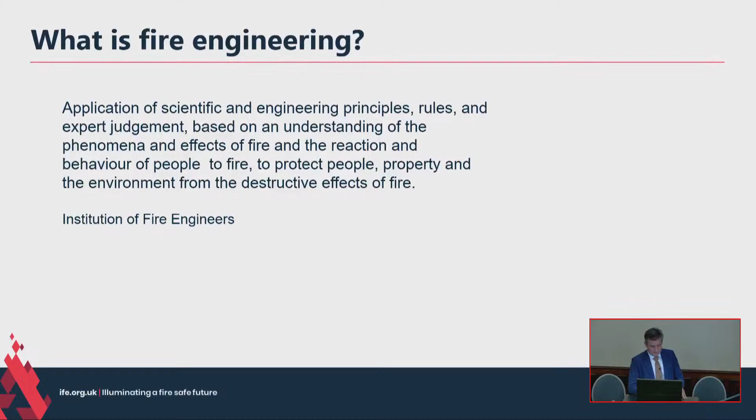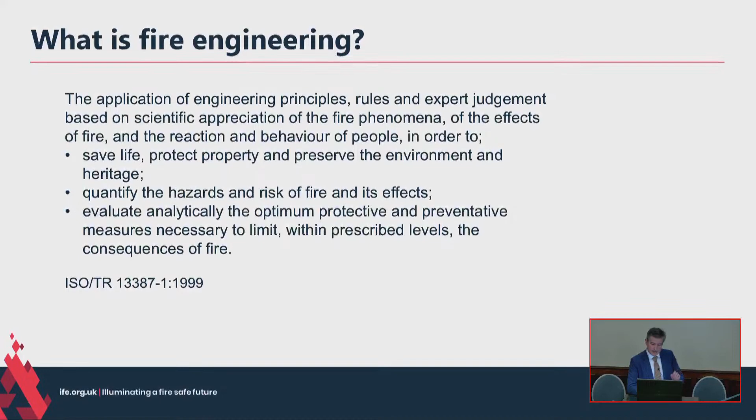There is another definition, and I prefer this one because it's really simple: use of engineering principles for the achievement of fire safety. So the kind of fire engineering I'm talking about today is a performance-based way of meeting functional requirements that are set out in national building regulations.

And in the UK, those functional requirements come from various bits of legislation. We have the Building Act, we have the Sustainable and Secure Buildings Act, and most recently, coming into force completely next April 2024, is the Building Safety Act, particularly for higher risk buildings.

But the purposes of these regulations are listed here. We've got health, safety, welfare of people in and around buildings. The legislation clearly has a life safety focus. Interestingly, you'll notice that protection of property or protection of business is not really mentioned in these purposes. Well, unless you argue that preventing buildings from burning down helps with sustainability, and that's probably a valid argument.

So we'll just try and remember that legislation is, quite rightly, convincing us that fire safety is about life safety. But what about that little bit extra? We'll come on to that later.

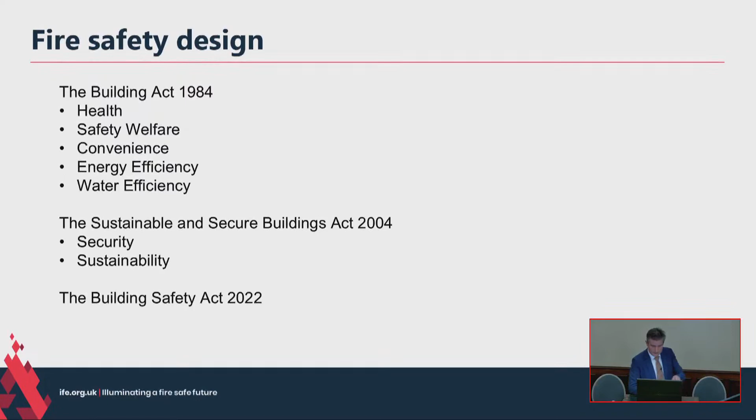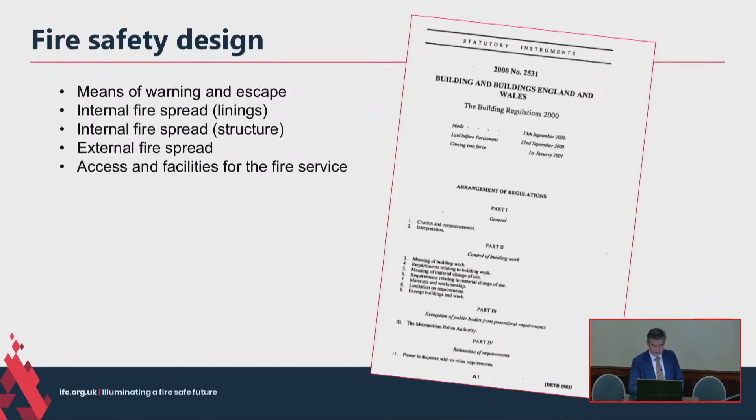And those functional requirements for fire safety in building design are set out in building regulations. I just happen to have the building regulations of England and Wales here, and building standards in Scotland. And they're really quite simple goals, such as these that are listed in Schedule 1 requirements for fire safety. It's not always been this way, though.

Statutory fire safety provision in the UK has evolved slowly over many centuries, and it's largely been driven by major disasters. In the 20th century, experiences of fires during the Second World War were incorporated into the post-war building studies on fire grading of buildings. And these were seen as landmark documents of their day, influencing the technical content of subsequent building regulations. By the time further amendments were made in 1976, so that book on the right, the regulations comprised 307 pages, and they were highly prescriptive.

These traditional prescriptive building regulation systems had procedures to oversee departures from a standard solution, but these seemed to be cumbersome in nature. So in England and Wales, such relaxations were at one time only granted by central government. And that was seen as quite a cumbersome and difficult system.

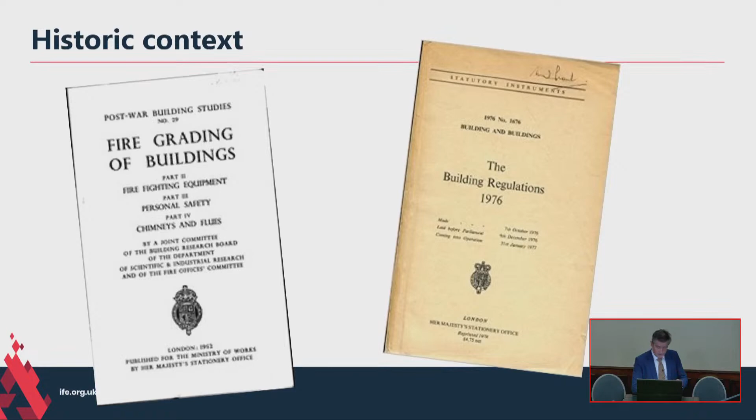So where has performance-based engineering come from? Well, it's been born out of the need for it. As a result of a large and rapid increase in innovative and diversified building design, including the expansion of air travel in the early 1970s, prescriptive regulations became demonstrably restrictive and inflexible. By way of example, air travel required airports to start handling large numbers of people who were unfamiliar with their building, but they needed to be handled in a pleasant and efficient way.

Designs based on prescriptive standards of the time simply couldn't cope with this new design requirement. So some engineers and scientists saw the possibility of applying scientific research directly to the design of individual buildings.

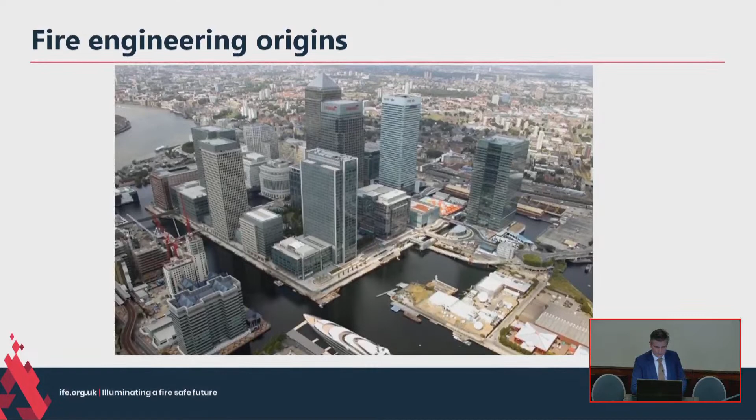Whilst formal recognition and acceptance of the use of fire engineering had been given in England and Wales within that 1985 edition of the regulations and accompanying Approved Document B, there was no guidance given on how to use those principles. So pressure for guidance and a structure for the application of fire engineering to the design of buildings came from designers, and an initiative by the British Standards Institution to provide a code of practice was begun.

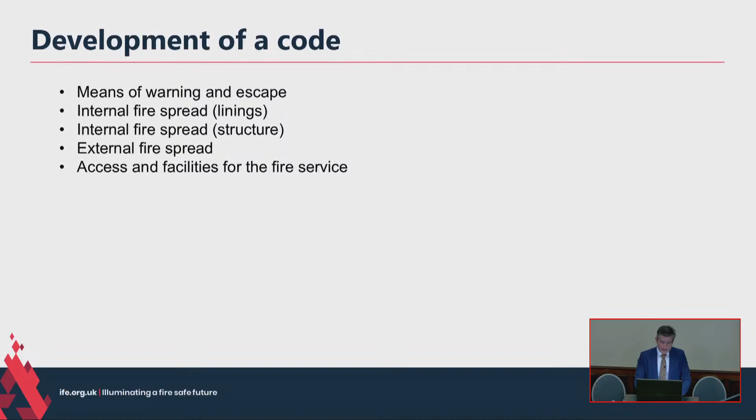In 1989, a format and a list of contents was presented to BSI, and by the end of 1990, a small panel of fire safety engineers was formed to undertake a three-year contract administered by BSI, which would culminate in a code of practice giving the framework for fire engineering design in buildings. The panel first met in 1991, and the draft code of practice was published as Draft for Development, DD 240, in 1997. Six years - that's not bad for BSI.

DD 240 was described at the time as being the most important document produced in the UK in support of the use of these more fundamental approaches to fire safety design. It provided the designer and the regulatory enforcement authorities with an overview of what was considered to be necessary. It was structured into subsystems, and importantly, it indicated that there were still gaps in knowledge and much still had to be achieved by engineering judgment.

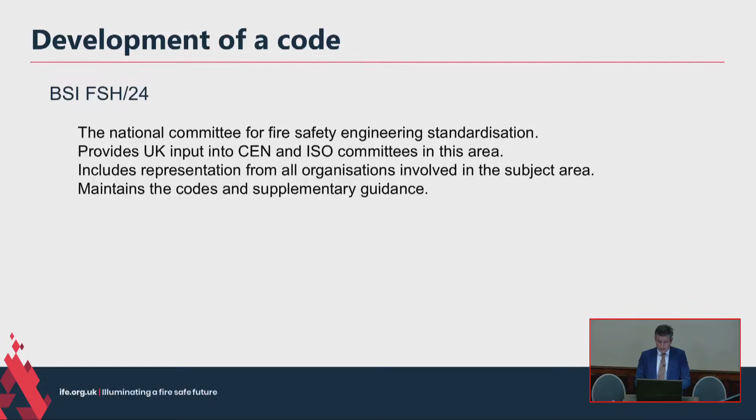Since that publication, DD 240, the group within the British Standards Institution, FSH 24, is a technical committee. They remain responsible for the development of standards of fire engineering in buildings. That committee draws representatives from a wide range of stakeholder organisations, as well as research bodies and teaching and practising fire engineers. So FSH 24 is the National Committee for Fire Engineering, and it mirrors much of the work that goes on in ISO committees around the world.

FSH 24 has been responsible for developing, from that Draft for Development DD 240, the standard BS 7974. This document was first published in 2001. It's supported by 8 published documents, each containing detailed guidance on different aspects of fire engineering, from background information to quantitative risk assessment.

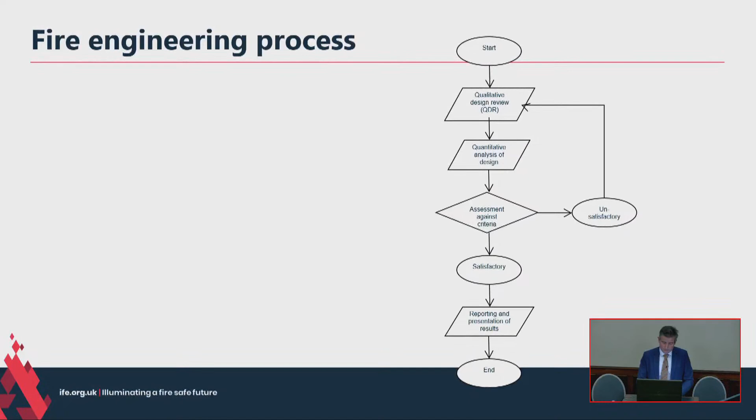A framework for the application of fire engineering is provided in the standard, and the essence of it is defined here - this flowchart is what you see at the start of the document. Essentially, you can boil it down to three stages. The first is a qualitative design review, where the scope and objectives of the fire safety design are defined. These tend to be drawn from the architectural requirements and the functionality of the building. The performance criteria are established and acceptance criteria are set. So that QDR is a very important part of the process.

Then the next bit is the quantitative analysis. That's where engineering methods - hard sums, maths, computational fluid dynamics, that kind of thing - go on to evaluate potential solutions. Then the important bit is assessing those outputs against criteria. The results of the quantitative analysis are then compared against the acceptance criteria to work out whether the solution is safe or otherwise.

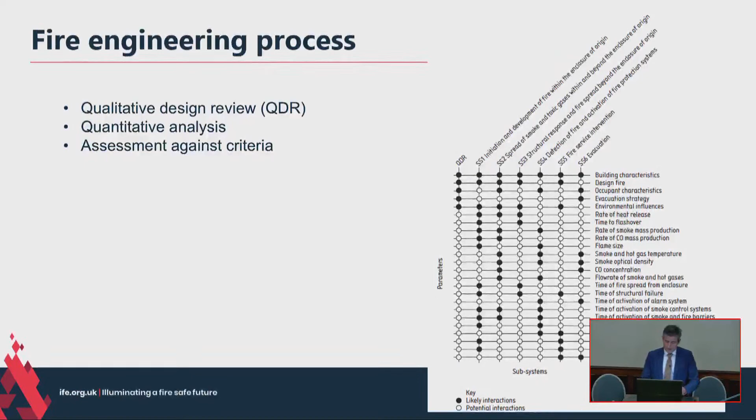That quantitative part is divided into a number of separate parts or subsystems. Each can be used in isolation, or they can be used in combination, which is represented on this difficult to read and unnecessarily complicated diagram you see above. That shows how these different subsystems work together.

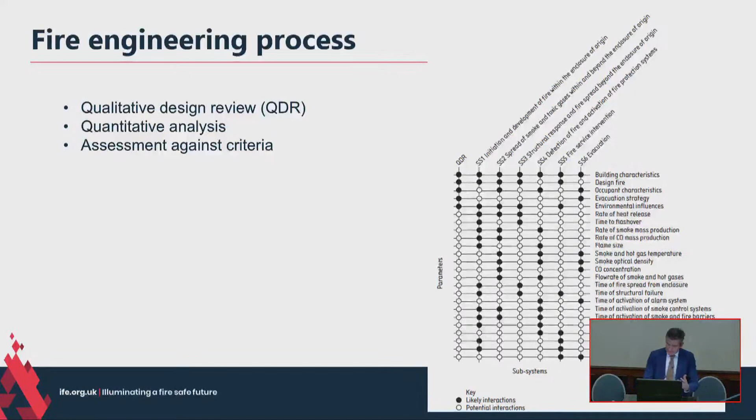The work of FSH24 is continuous. I go on about FSH24 quite a bit because I chair it, so I'm quite close to how things get developed there. The last part written from scratch was in 2012. That was PD8, which is an interesting document because it describes a way of introducing those property protection and mission continuity objectives that we talked about at the beginning, which are difficult to find sometimes.

So it's an invaluable tool that's really used in discussions between architects and their clients about what they should be paying for up front, getting resilience in the design.

Then, as part of BSI's 5-year review cycle, it was decided in 2016 that it was about time we revised the documents. So we got a panel of volunteers and experts together, and that revision process began. After a period of hard work, through a draft published for public comment, the current standard was launched in 2019.

I'll just quickly tell you what's different from the previous version. The British standard itself has been completely rewritten. It now incorporates those recommendations that were previously in PD8, which is why that's shaded out now. PD0 has been withdrawn because it was largely duplicated. And PD4 has been withdrawn because it provided guidance on fire detection and activation of fire protection systems, but that guidance can now be found elsewhere in different standards.

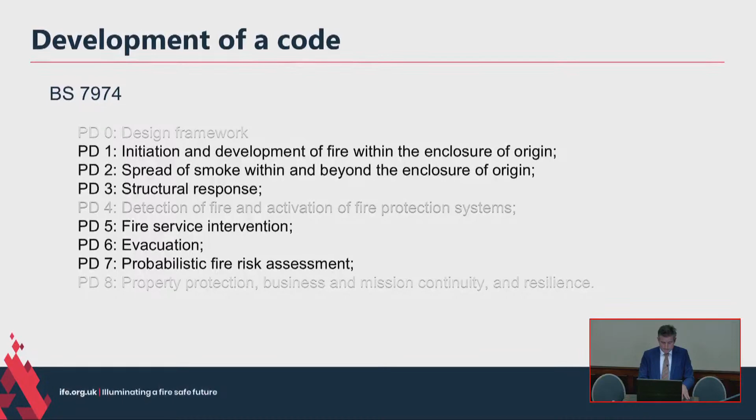PD5 was amended rather than fundamentally revised, to reflect changes in practice and advancements in knowledge. But importantly, it was amended to incorporate some of the emerging lessons coming from the Grenfell Tower public inquiry phase 1 findings. We know more findings will come when the public inquiry findings are released next year, so there'll be more to do there.

And that's where we are today. I can tell you've done the maths and you know there's a 5-year cycle, and it was 2019, so that's right, next year we're going to have to start that process again.

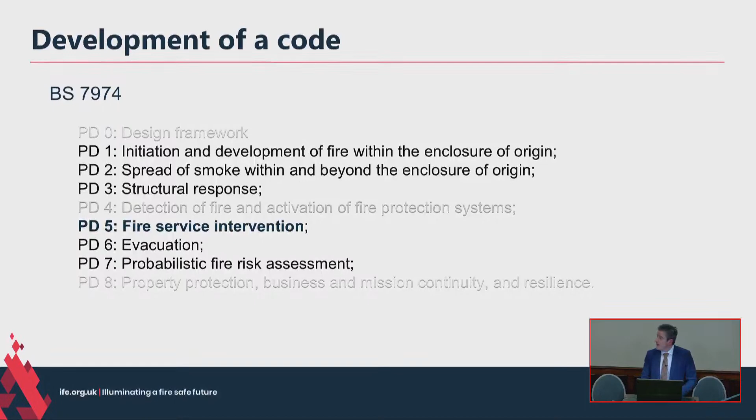I think it's generally agreed that traditional prescriptive design techniques have their place, but they can be a barrier or a stunt to innovation and creativity. They're impossible to apply sensibly to particular buildings with special functions, such as entertainment venues, high-rise developments, sports stadia, airports. Fire safety engineering has really freed up building design, facilitating it, while because we've got that standardisation process in BS 7974, the process has provided suitable levels of safety when carried out properly.

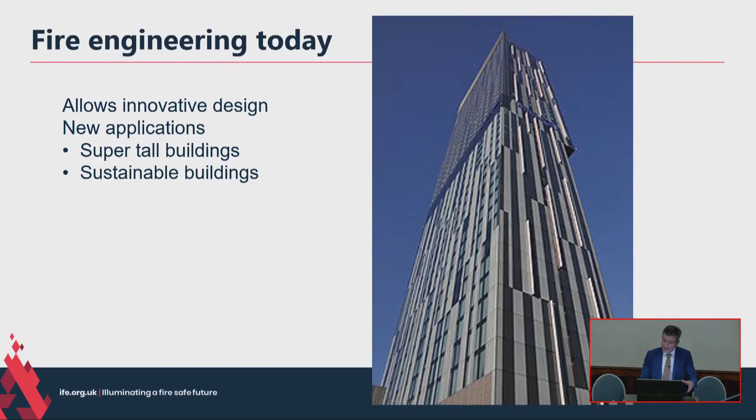Fire engineering was originally the pioneering method enabling the design of buildings such as airports and enclosed shopping centres, but such buildings are now commonplace. The new frontier for fire engineering includes the design of very tall buildings, such as those using lifts for rapid evacuation of occupants. Another area where fire engineering is beginning to impact concerns the sustainable construction agenda, helping to address that balance between protection of the environment and prudent use of natural resources.

Now, despite these successes, research has revealed that concerns exist surrounding the use of fire engineering principles, including questions as to whether the fire engineering design community has the knowledge, data and tools required to fully undertake these advanced analyses. Furthermore, motivations for using fire engineering are sometimes being questioned.

Numerous examples are being documented where architects, and other building designers, are seen to be trying to buy their way out of problems they've created through poor design, using complex technology and inappropriate fire engineering arguments. One article I read describes this as performance-justified engineering, and warns that fire engineering constitutes a significant threat to its credibility as a design tool.

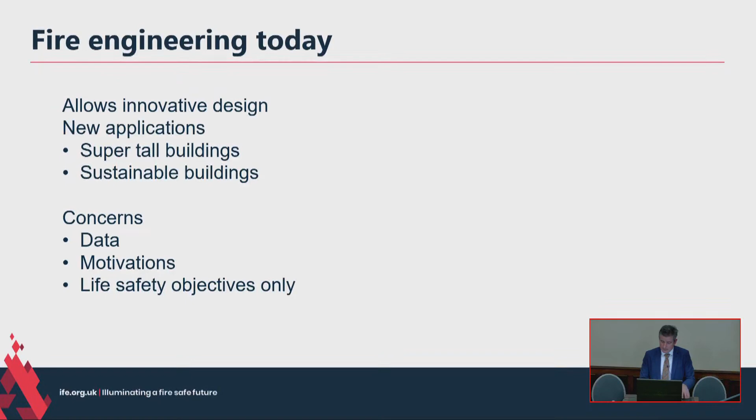Similarly, there are concerns over the fire safety objectives used to compile a fire strategy. It's common practice for projects to concentrate solely on life safety, because that's the bit mandated by the building regulations, and it can have a detrimental effect on property and business protection when compared with prescriptive solutions. I'll talk about an example of that later.

So, it's widely accepted that the profession has matured from its origins in the mid-80s to a situation today where it's emerged as a recognised separate engineering discipline. Fire engineering is becoming more accepted in the UK, and a change has been seen in the types of buildings fire engineering is applied to, recognising that it's frequently applied to more mundane projects.

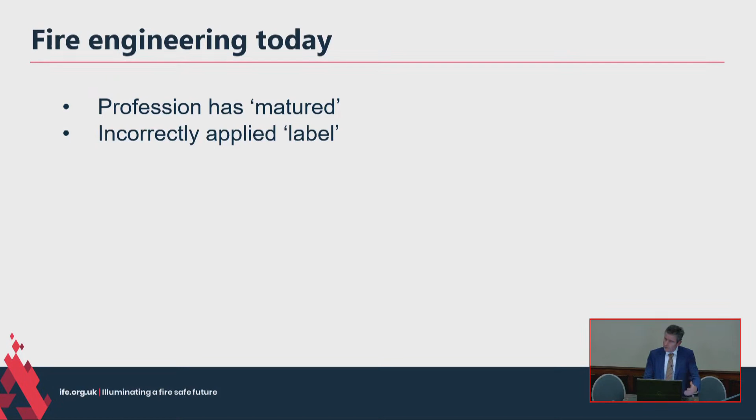There sometimes feels as though there's a proliferation of designs for buildings which don't comply with prescriptive codes that have been labelled as fire engineering, because it enables them to be put forward with an argument as to why they don't need to comply. It's important that we use fire engineering correctly, for the right reasons and for the right projects.

Fire engineering has been able to be used more widely because the tools available are now more sophisticated. That's another indication of a maturing discipline. Think about the computing power needed to do CFD simulations and things like that—that's come on leaps and bounds, so we can do more iterations of designs on desktop computers, where it might have taken several computers in a different room running overnight in some instances before.

It was a really interesting piece of research, and it involved me asking interviewees about the perception of the roles of other stakeholders involved in fire engineering. Analysis of their responses shows that interviewees had more critical comments to make about their fellow professionals. So this is why I tread carefully at this point.

The four stakeholder groups that attracted most criticism were architects, regulations enforcers, sometimes known as building control, insurers, and practitioners—fire engineers themselves. So over the next few slides, there's a selection of sound bites. It's not the whole story, so don't shoot me, I'm just the messenger.

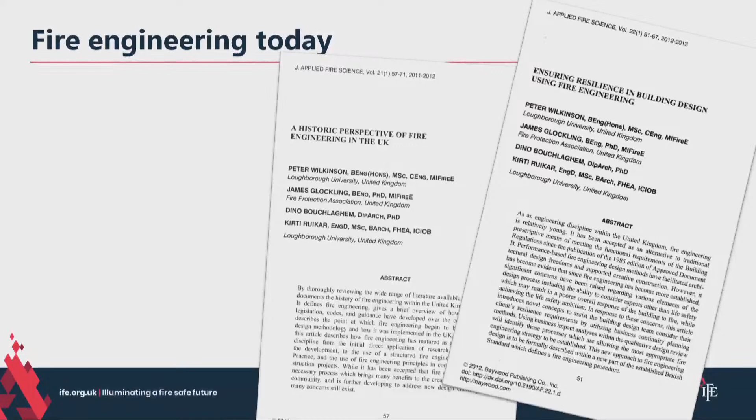Whilst the input from academics is widely valued by their fellow professionals, it was felt that they're often disconnected or removed from the real world. This was felt both in terms of teaching and research, as their industrial experience is perceived to be limited, and they struggle to keep up with the speed of change.

The work of building designers was described as mostly well-intentioned. However, they did receive quite a bit of criticism from other interviewees for not understanding fire safety issues and not understanding how to use fire engineers. There was an issue reported of architects losing skills, raised a few times, as well as many interviewees criticising what they considered to be inadequate fire safety-related training in architectural degrees.

End users—people who commission new buildings or use the buildings—their criticism can be summed up as a lack of engagement when the building is designed, and then falling short of their responsibilities during the operation phase. It was stated that often end users don't even know that they're in a fire engineered building, because of the lack of information that's transferred to them through the construction company to the client.

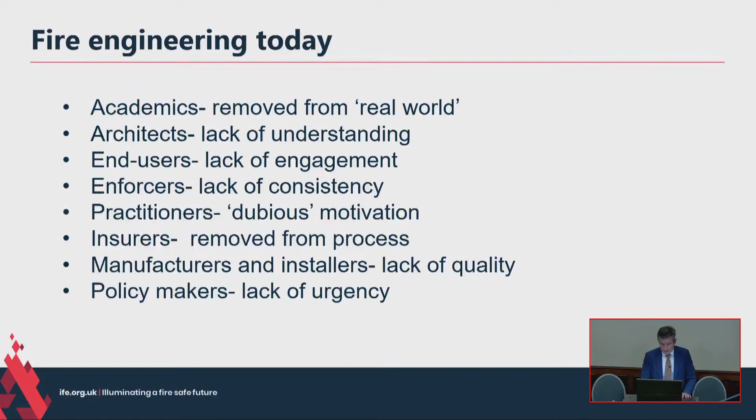Right, I think we can brush over that one for now.

Institutions and trade bodies are seen as vital within the fire engineering process—they're the groups who translate research into practice. Even the IFE received some criticism. It was thought they could do more to promote good practice, regulate its membership, things like that.

I'm pleased to think that since I did this research, great strides have been made and continue to be made, particularly following the Grenfell Tower fire and the review of building regulations and fire safety carried out by Dame Judith Hackitt. She really amplified all the aspects that this research revealed.

And much support has been given to tackle some of these issues and make the environment that we work in as fire engineers better.

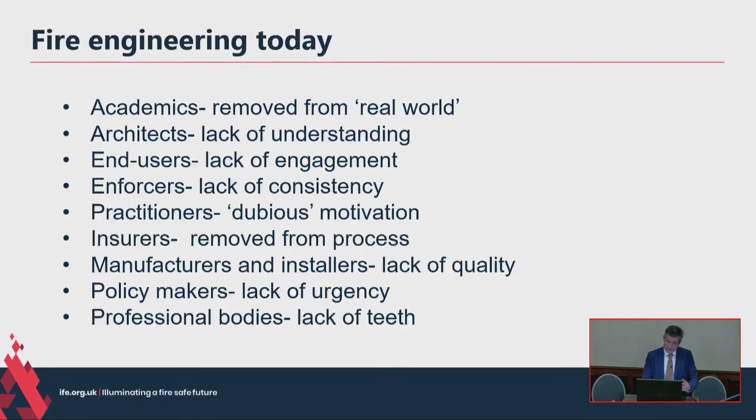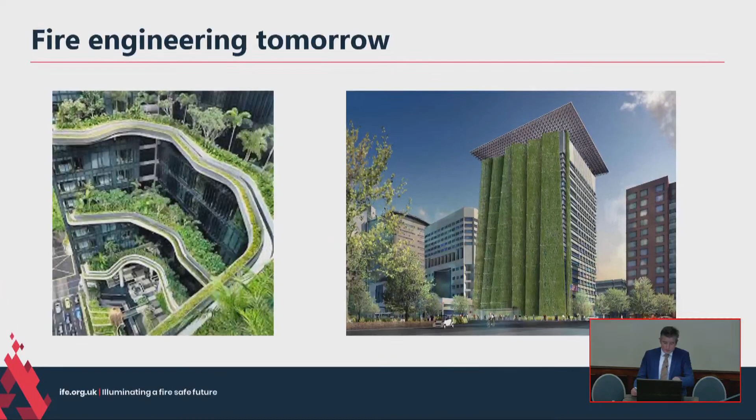So thinking about tomorrow and how fire engineering can be, whether our future building design challenges are squiggly or straight, whether they're even floating, whether our buildings are green or even golden, fire engineering uses established methodologies such as that outlined in BS 7974 as a key process for facilitating such design freedoms whilst giving a robust methodology to ensure adequate levels of safety and resilience provided.

Now I'm checking the time, and I know I'm okay, because I'm now going to explore the thorny issue of competence for the fire engineer. And I'm going to be a bit selfish because I'm quite interested in the history and how our institution developed and how the profession started.

So I'm going to take a quick look back at some of the discussions that were had about competence in the past. I'm going to revisit some of those light bulb moments, because it's very interesting to see that there's nothing new in this. People have been saying it for a long time and we just seem to forget.

So I'm going to begin with some wise words from one of the pioneers of fire engineering, and I've already mentioned her because she was influential in the design of Stansted Airport - this is Margaret Law. Professor Law began her career as a scientist at the Fire Research Station, and she carried out research into many aspects of fire behaviour and its effects on building materials and structures. She became involved in the application of these research results into building regulations, codes of practice and design guides, and she joined Arup to act as an advisor on fire engineering for those projects that they were designing.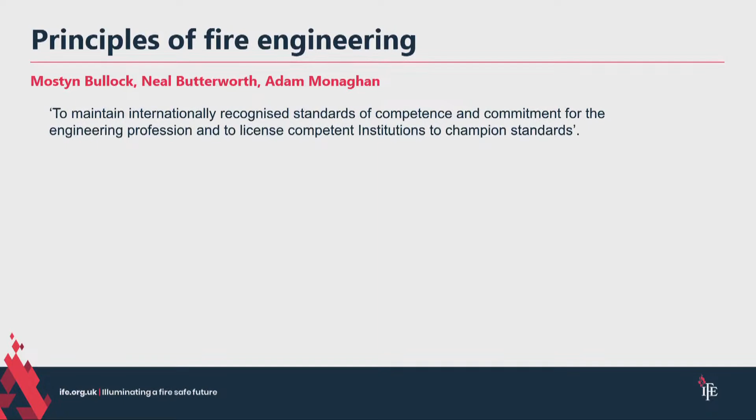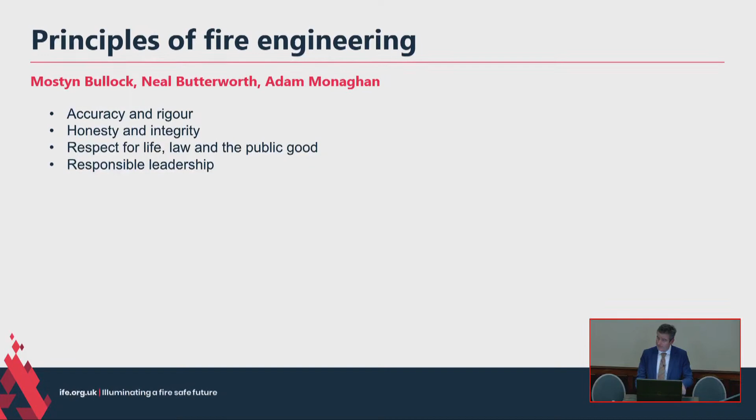So we've just been through these 4 pillars, and I was saying how this led to the enhancement of IFE's whistleblowing policy and establishment of an ethics committee. The Engineering Council and the Royal Academy of Engineering built on their Statement of Ethical Principles, established in 2019. The group published a report called Engineering Ethics: Maintaining Society's Trust in the Engineering Profession. It proposes actions and appropriate regulation to achieve a more ethical culture in the UK's engineering profession, reminding us of the inevitable tensions between profitability, sustainability and safety that engineers need to be aware of and balance.

There have been some important questions posed in recent years, and social media has amplified that public scrutiny. This report cites the work of Dame Judith Hackitt, who carried out her review of the building regulations and fire safety following the Grenfell Tower tragedy. She highlighted that it was a cultural issue across the construction sector, which can be described as a race to the bottom, caused either through ignorance, indifference, or because the system does not facilitate good practice.

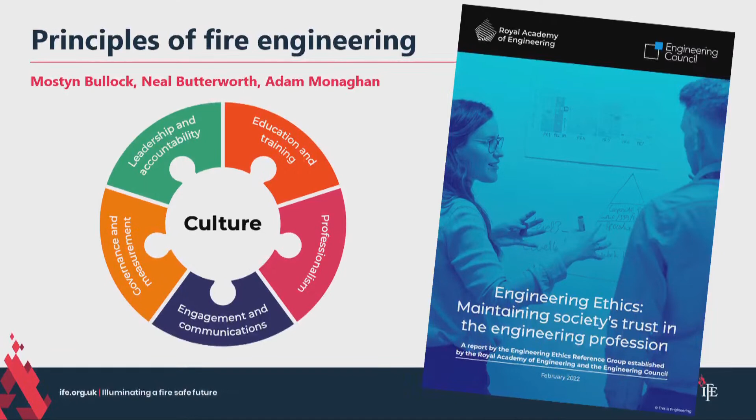This is the final person I want to talk about, who gives some important information about competence: Dr. Angus Law, a lecturer in fire safety engineering at the University of Edinburgh and a member of IFE. He was asked to chair a meeting on competence in June 2018 by the industry response group, set up following the Grenfell Tower fire. I love a good quotation, and Angus quoted Confucius: 'Real knowledge is to know the extent of one's ignorance.' He also cited work by Kruger and Dunning from 1999.

Are you confident because you have knowledge, or are you confident because you have no knowledge? The purpose of this aside was to make the point that one of the most important aspects of competence is assessment of self-competence. But there's an inherent difficulty in that, because a lack of competence can give an illusion of competence, and often those with the least competence consider themselves the most competent.

Bit of a conundrum. But Angus introduced the concepts of specific competence, common competence, and interdependencies. Specific competence: particular professions have specific competencies that only that profession can have and assess—for example, specific fire engineering skills. Common competencies are those across professions, and professional ethics sort of sit in that type. Then there are interdependencies—competencies required of one profession by another. He also said a professional institution, by definition, should have a monopoly on a given activity; for example, a fire engineer can only be assessed by a fire engineer.

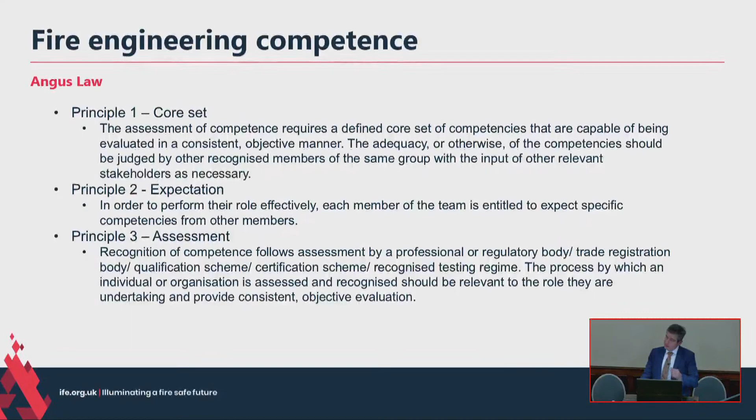The core set of principles and expectation and assessment was a kickstart for work which has led to another BSI document I'm going to tell you about, called Flex 8670.

This is the core criteria for building safety in a competence framework. It's a code of practice, published in April 2021, created in response to findings from the Hackitt Review, which highlighted a fragmented approach and a lack of consistency in the processes and standards for assuring competence of those working on buildings as a major flaw in the current system.

Flex 8670 provides a core set of principles of competence, including leading and managing safety, communicating safety, delivering safety, risk management, regulations, processes, building systems, ethics, and fire and life safety. Whatever the profession, everyone should have an understanding of some aspects of fire and life safety.

So what's the common theme with Margaret Law, the principles outlined so well by Mostyn, Adam and Neal, the work from Angus Law, the Royal Academy of Engineering's work, and Flex 8670? Well, I see it as this.

Amongst other things, being competent is a combination of acquiring knowledge, practicing experience, and now we know, living by appropriate behaviours. I think as an institution and as a profession, we've known this for some time. And for me, the important element of this is the behavioural aspect—it's about taking personal responsibility.

We have members representing the whole spectrum of the fire sector. I've said we're a professional engineering institution, so we're licensed by the Engineering Council to register chartered engineers, incorporated engineers, or engineering technicians, and we operate a UK-based fire risk assessor register. And there are some statistics here: 11,000 members worldwide, lots of branches, lots of exams, lots of registrants.

I'm on the home stretch now. So, why is what we do still relevant?

Here's the obligatory photo that precedes most building safety presentations these days. I appreciate it's now 6.5 years ago, but we can all reflect that in June 2017 in West London there was a tragic fire that claimed the lives of 72 people in their homes. Since then there's been numerous reviews, most notably from Dame Judith Hackitt. There's been a public inquiry that's still in process, not yet fully concluded or reported, and then criminal investigations will follow, as well as a whole lot of soul searching.

But fire is still using its destructive force. Let's just think about the last 6 months.

At the end of August this year, 74 people died following a fire in Johannesburg, South Africa. Dozens more were injured in a blaze that happened in a 5-storey building in Marshalltown, Johannesburg.

The building had been abandoned at one stage, and then people had been living in it. It's an ageing building, located in a deprived area. It used to be the business district in Johannesburg's economic hub, but was being used as an informal settlement. This area is infamous for what's called hijacked buildings - a term used in South Africa to refer to buildings that have been illegally taken over by unscrupulous landlords who rent them out.

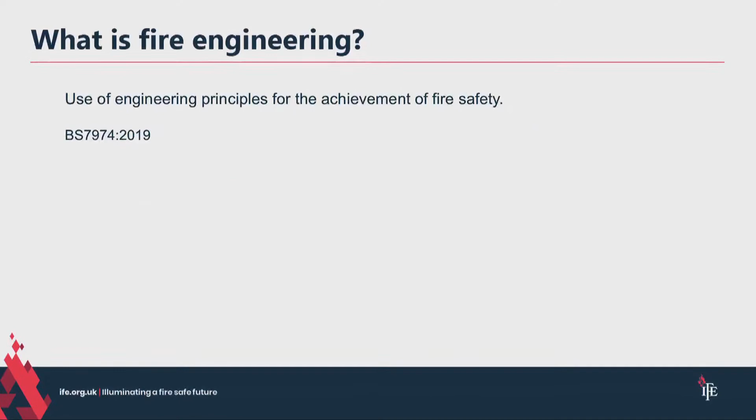Sorry. Apologies, gentlemen, ladies. I overran by half an hour on a talk, so you're still okay. Oh, I've got plenty of time then.

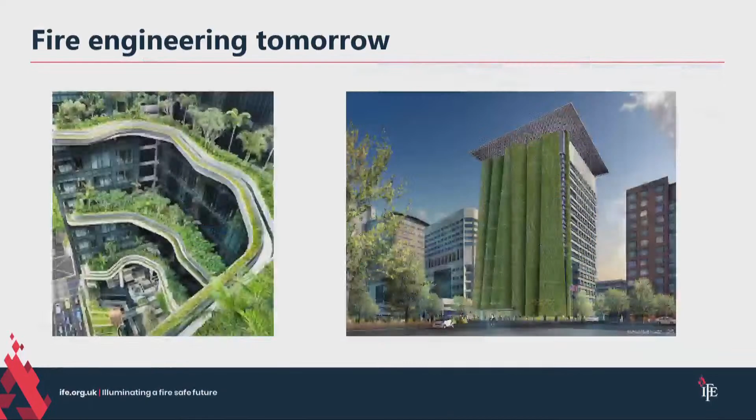Brilliant. Thank you. Thank you.

Almost 25,000 people evacuated from their homes due to wildfires in Canada. More than 10 million acres of land became involved, the country's worst wildfire season ever. And the wildfires in Canada this June caused huge air pollution problems in New York, Washington, and Philadelphia.

So why are these worthy of note? Well, there are areas in the world that are categorised as wildfire prone, such as many areas in Australia - they call them bushfires. Architects and engineers are well aware of how urban planning and building design has to be mindful and prepared for this in that wildland-urban interface.

But these wildfires are happening in different places now, and I think as responsible designers and engineers, it might be necessary for us to start to remember those lessons that have been learned in other parts of the world, maybe worthy of closer inspection in areas that are less familiar with it.

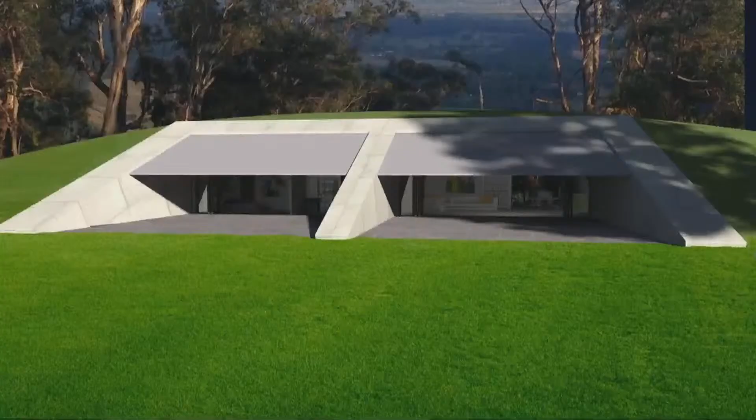For example, here's a particularly swanky version of a bush fire resilient house in Australia, designed specifically to resist wildfires progressing over it. Probably a bit extreme for the UK, but let's not forget wildfires are occurring more frequently even in the UK. This May saw the largest recorded in the UK. The Scottish Fire and Rescue Service said flames had burned through a 30 square mile area of scrub, and a 12-mile plume of smoke from the incident was detected from space by NASA satellites.

And it reminds me of a fire closer to where we are today. If you remember, in 2008 the Findus factory in Longbenton—you remember it, don't you? You remember road signs used to say 'Welcome to North Tyneside, home of the crispy pancake.' Well, that just reflects how important the factory was to the local economy and the community. The factory didn't reopen.

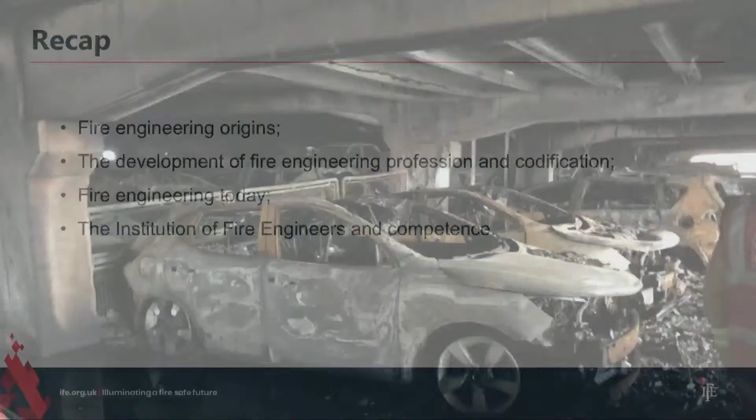We've taken a look at the origins of fire engineering, described its development, how it became standardised in a code of practice. I've introduced the Institution of Fire Engineers to you, and we've considered some of those competence questions that are critically important, as well as considering some fires that have just happened over the last 6 months.